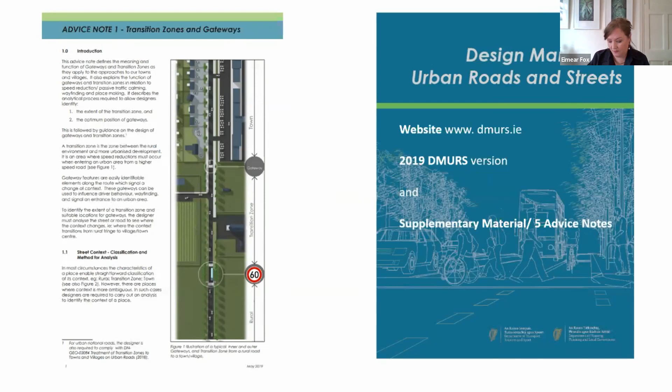So why do we have a DMURS and a TII document? Just to clarify the role of both: DMURS is mandatory for all urban roads and streets within the 60 kph zone, including gateways - both inner and outer - town core, transition zone, and residential zones.

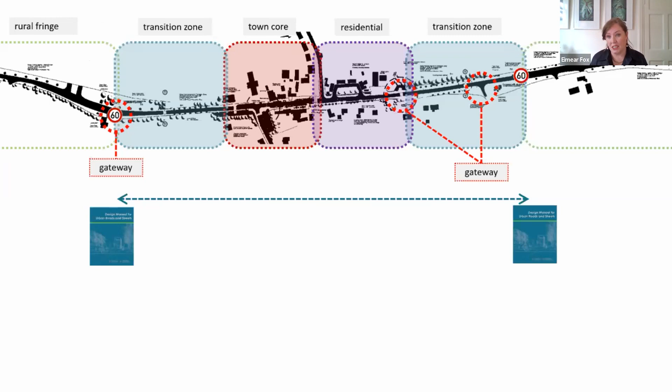It sets out practical design measures for placemaking and to encourage more sustainable travel. The TII standard complements it, describing the requirements in particular for national roads, covering traffic calming within the 60 kph zone, but also the rural fringe, which is the section of road on the approach to the 60 kph.

The rural fringe is the area between the high speed road and the lower speed sections of road, generally about 500 metre sections on the approach to the speed limit. One of the key design challenges is that the rural fringe looks very similar to the rural sections.

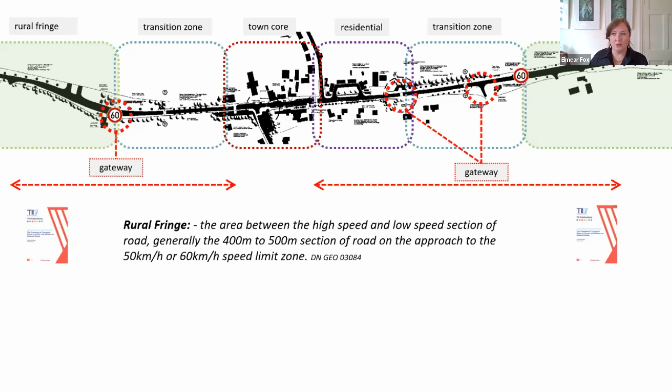So there can be a very abrupt change in terms of the streetscape of towns and villages, especially with hard shoulders. There are a lot of safety considerations in the rural fringe which don't apply in the 60 kph zone, which again limits the design tools. It's an area we're working on in TII, and though it's outside of DMURS, it's important to see it in the context of the journey through the town.

Transition zones typically contain several community facilities - schools, sports clubs, churches, health facilities, open spaces, larger retail developments and light industry. The streets in transition zones can create important safe and green connections between these different land uses and densities of development.

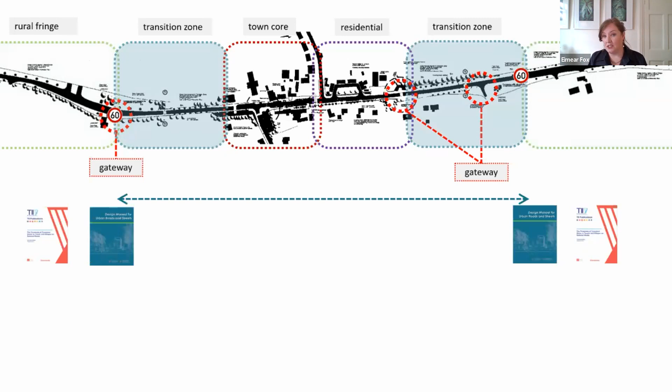The transition zone document also deals with gateways - both documents do, actually, and you can see the different focus in a sense. The DMURS advice note looks at gateways as points that signal a change of context or a point of arrival. The TII definition really focuses on indicating where there's a change in speed limit.

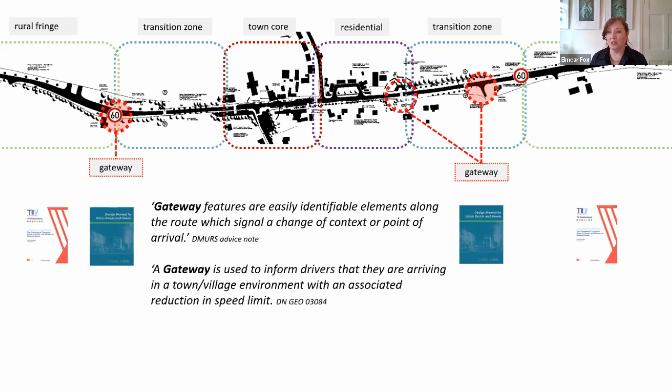But they're both incredibly complementary. It's about having as many functions out of the gateways, and they're also an important identity to the town, indicating your entry into a community.

So just briefly on gateways - the scale of them really depends on their location, the scale of the space they're in, and also the speed and pace of the viewer.

I added a slide here about the rural fringe, because talking with Leonora Neyman earlier in the week about Ennis, we were discussing how a lot of towns and villages have gateways that are part of the motorway network, which is again in TII's remit. So how do we look at that speed reduction from a motorway through to a gateway?

The second image there is Birr, which is a really lovely sculpture at the gateway to the town, combined with really strong avenue planting, and planting used to define active travel as well. So it sets up a very strong kind of procession through to the town.

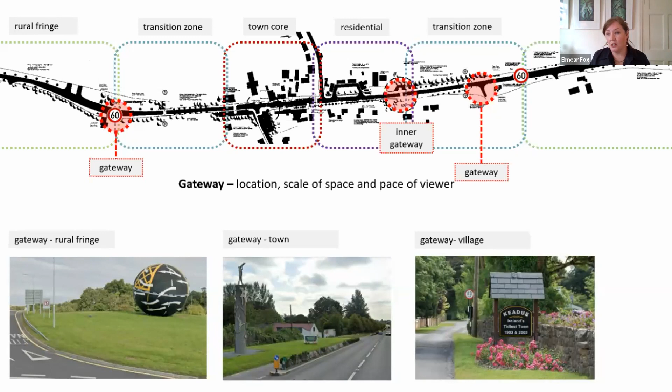And then you go right through to smaller villages where obviously the scale is much smaller, the roads are much smaller. This is Keadue in Roscommon, which again has a very strong planting palette at the start to really catch the eye as you're coming to the 60 kph zone.

The other thing we really want to look at is opportunities when developing the initial visions for schemes. Traditionally the focus tended to be on the transport function of road schemes, traffic numbers, transport and engineering requirements. But we really need to move this focus away from that and recognize that really successful streets have other key elements: water management, biodiversity, landscape, and opportunities for local communities.

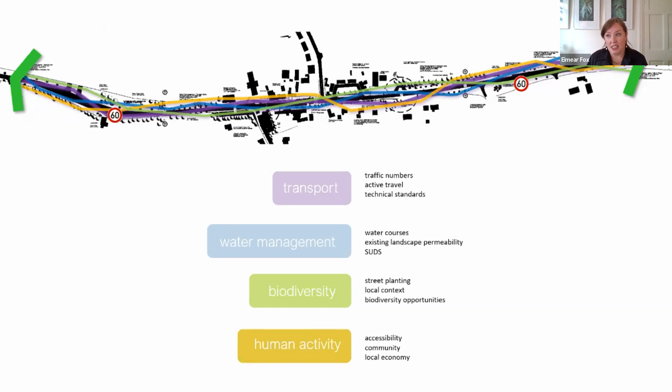Many times the street might be the only really public space in a village, so all of these threads need to weave together to make the most of the space. We need to really look at how transport investment results in advantages beyond just network efficiency, a systems approach, if you like.

This thinking very much aligns within ourselves and TII with their sustainability implementation plan, which really looks for all our projects to deliver benefits for all of society, and also then the UN Sustainable Development Goals.

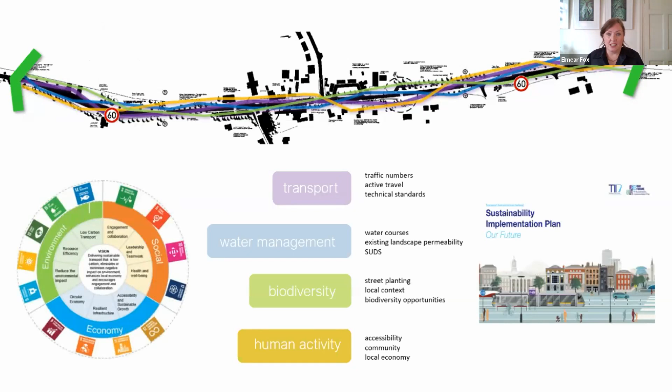In terms of reference and guidance for transport, obviously there's DMURS, there's also the new cycle manual that's due to be published. As Jason said in the intro, there's the pollinator friendly management of transport corridors, bringing biodiversity. We have the new interim guidance on SUDs, and actually DCC have a really good sustainable drainage design guide.

And then really following on from DMURS, we're looking at who is using the streets and looking at design tools to focus on particular street users, which I'll go into in a bit more detail.

This is a slide that I actually borrowed from Mick Bradley. Thank you, Mick, for letting me use it. He talked in one of the series earlier where it struck me - he was talking about how our town centres are the heart and that we're the blood cells.

Not being too cheesy, but in a way, transition zones are the arteries. Is it kind of counterproductive to spend money and time enhancing town centres if there are poor and clogged routes to hinder people from sustainably accessing them? Again, we need to look at the full system.

One of the key characteristics of many of our transition zones is that generally we have space, unlike in most town centres where space can be at a premium. So in transition zones, when applying both placemaking and traffic calming measures, we do have the opportunity to reallocate space in a more equitable way.

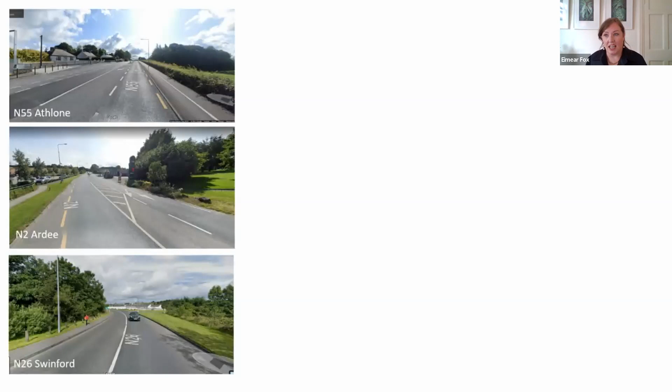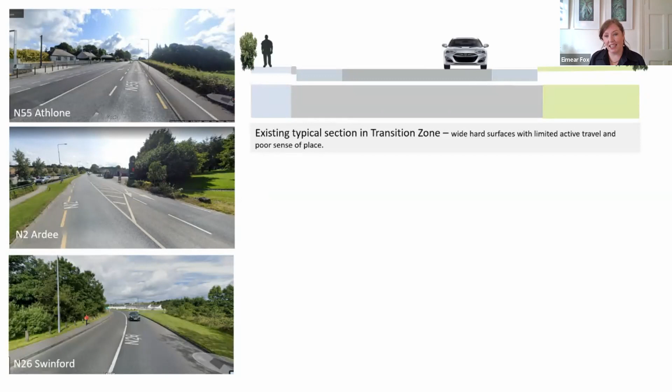And there's some examples of transition zones. All of the examples I'm going to be using are national roads because that's where we focus in TII. But you can see that applying standardized technical guidance really gives quite a standardized approach. Generally in these areas there's excessively wide carriageways, tends to be little active travel, and quite a poor sense of place, really.

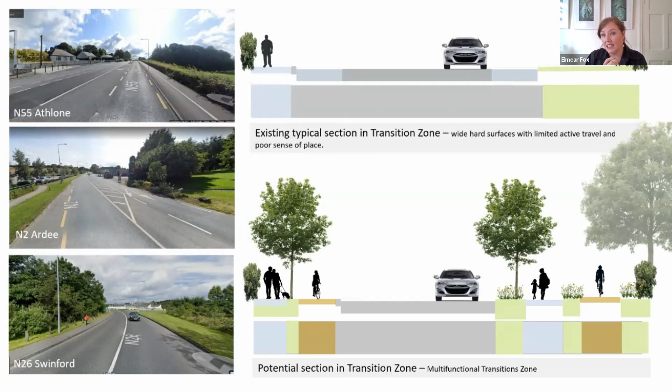So if we look at reallocating space, we can best see how our streets can achieve the sustainability vision - space made for walking, cycling, and landscape, which has multiple functions. By creating more pleasant streets with multiple functions, you encourage a wider range of users and get more ecosystem services in terms of carbon sequestration, pollution control, water management.

If we just focus on water management, for example, trees catch rain in their foliage and branches, and some of that evaporates while the remainder is slowly released back to the ground. The SUDs function, of course, increases as the tree matures, so we need to ensure that they're planted to ensure good future growth.

Tree root growth is also important because that decomposition of roots increases soil infiltration rates and overall soil infiltration capacity. And the very act of reducing the carriageway width reduces the load on the existing drainage system, which are most often combined drains.

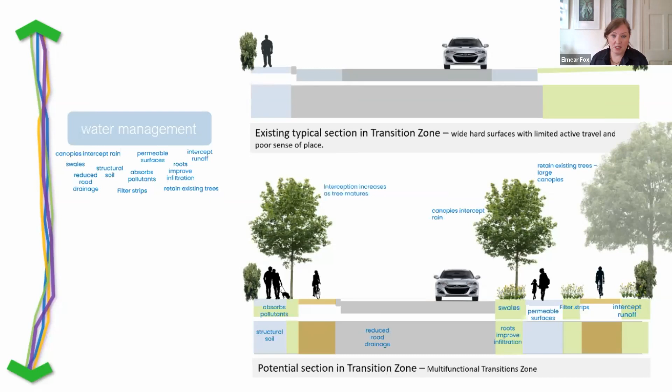Buffers between paths and cycleways create filters, which also absorb pollutants.

And if we look at community, people movement, because there's a lot of schools in transition zones, providing safe routes to schools can establish walking and cycling patterns at an early age. The more people who are out and about, the less social isolation, which results in impacts on mental health. The more eyes on the street, the less crime. So again, these functions need to be considered.

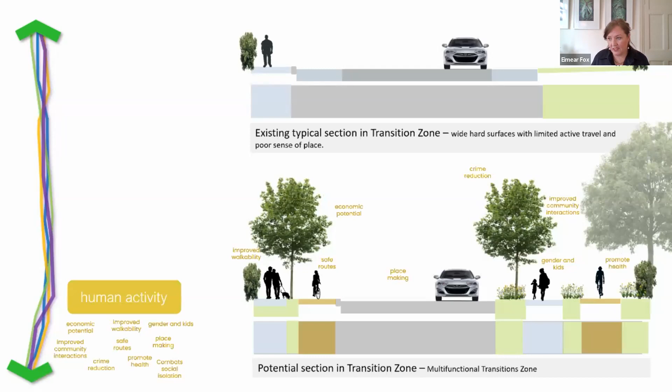Biodiversity: street trees can contribute, for example, to an increase in the number of bird species, especially when they're connected to blocks of green along the transition road zones, such as sports areas or hedgerows. It's actually really important that we retain existing trees and hedgerows because they're established natural communities with their own interactions.

Trees sequester and store carbon. They've got a cooling effect. So they're one of the few climate positive design elements of road schemes.

We also need, when we talk about trees, to address roots. I know it's unfortunate for road engineers, but all trees have them. We're always getting the argument against trees because of tree roots. But if they're designed and managed from the initial stage, they don't necessarily have to be an issue. The key is that you have sufficient room for the root volume to grow.

Trees also have the bonus that they actually appreciate in value and productivity as they mature. So they really are a great return on investment, but they need to be planned for right at the design process. There needs to be a root management strategy using root directors, linear joined-up tree pits, for example, and protection of roots of existing trees as well.

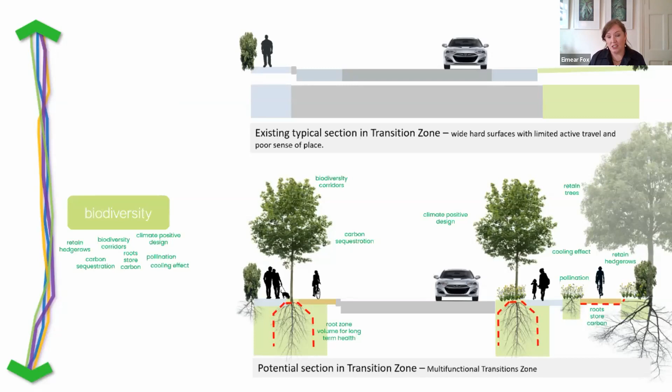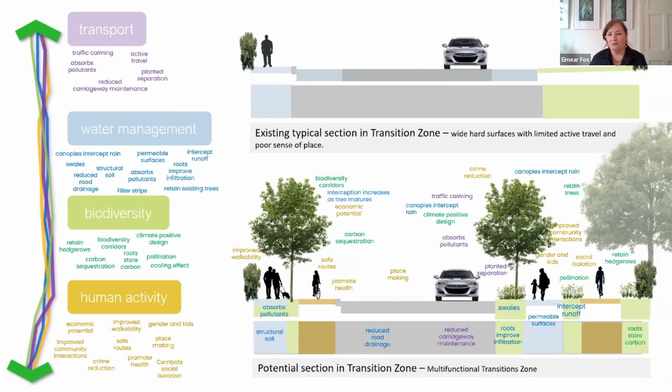You can see that high levels of movement and use by different groups at different times will promote urban integration and result in safer spaces. So we really need to recognize all these interrelationships to gain the most from our streets and make the most of all these synergies.

And we can really only do this if we recognize their value at the start of the design process. Given that there is space in transition zones, it's great to have a more flexible approach to design. Things don't necessarily always have to be in a straight line - we can make it about the journey rather than getting from A to B.

Another really critical issue that we found in transition zones is topography, because for a lot of people, changes in level can significantly affect their mobility. A lot of our transition zones, especially in towns on river banks, come down the side of a river valley, so there tends to be slopes involved.

So having, for example, mid-slope breakout areas for opportunities to rest, to regroup with groups of kids, spots to pause and play, in very simple ways - areas to enjoy the view, connect with the landscape, or just to step out of the flow of pedestrians. If kids are learning to cycle, it's all a sequence of spaces.

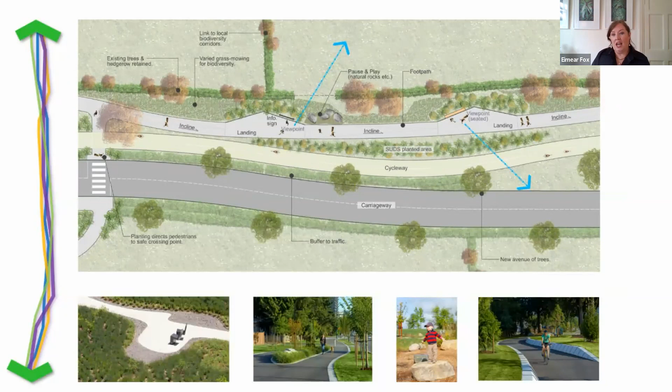Going back to the people who use the space, the community - DMURS advocates the pedestrian-first hierarchy of road users to encourage more sustainable travel, which is really brilliant. But when we talk about people-focused mobility, which is actually the core of Ireland's new sustainable mobility policy, we need to really think about who these people are.

I hate the term vulnerable road users because it kind of implies a level of strength and adversity nearly needed to get out on the streets - a battle of the fittest. But we do need to consider who these pedestrians that we're putting first are: their gender, their age, their travel patterns - it's not always about getting from A to B. Other aspects like viewing height, walking speed, all influence how a street is used or not by different people.

And this is just an example - there's a friend of mine whose dad lives in Wicklow Town, and I was asking her how he was getting on. She said that he doesn't get out an awful lot now because he feels he's in the way. He's getting old, he feels like he's too slow. When he's out on the footpath, he's worried that if people pass him he might fall over. And she lives in Abbeyleix, and her exact words were: he loves our wide, flat paths.

So when he goes to visit, he goes for a walk down to the coffee shop, has his coffee and cake. She knows there are benches along the way that he can stop and have a break. The footpaths are wide so he can be as slow as he wants. He meets and chats to people. So this is the reality of how road engineering can affect social isolation and mental health.

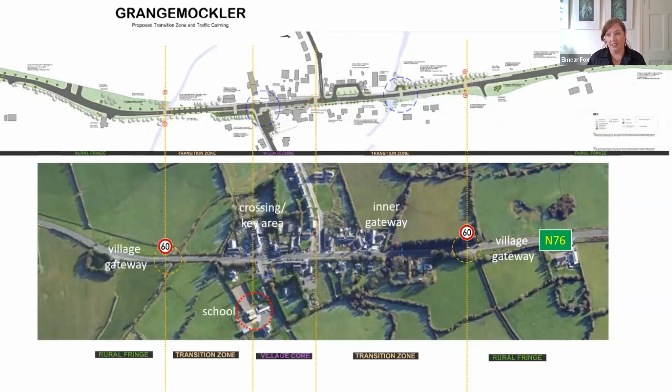Following the process of analysis and road zones, opportunities for gateways and key areas were identified, and a sketch scheme was developed, which we brought to Part 8 with Oliver Tierney and the road engineers in Tipperary.

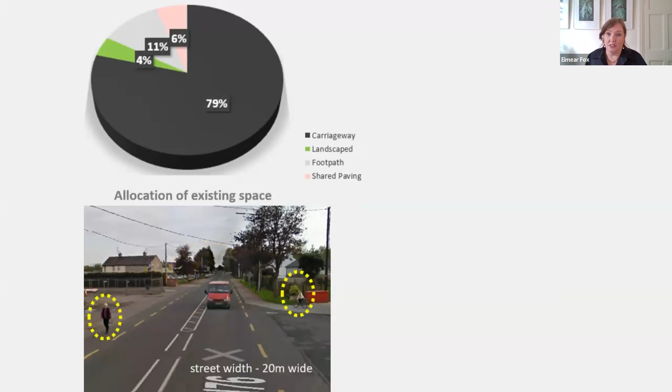The really interesting thing about Grangemockler is to see how space is currently allocated. This is the transition zone link between the residential area, and you can see that currently the space is really dominated by vehicular traffic - 79% of the space. This is at the expense of other road users. There's a poor lady there walking to the shops and there isn't even a footpath.

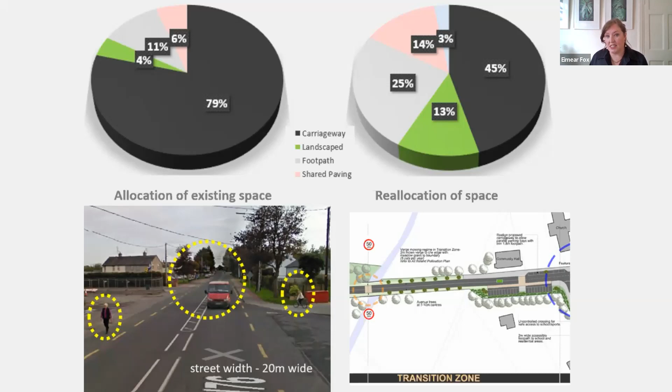By the primary design tool of reducing the carriageway width, there's such a significant reallocation of space, with pedestrians gaining so much space, from 11 to 25%, to move through the village. So it does create a more equitable street and allows people of all ages and mobility to travel. Just bear in mind that these graphs don't show the quality, it's purely the quantity.

You can see in the plan below that actually there were no footpaths at the shop and the pub and the town core beforehand.

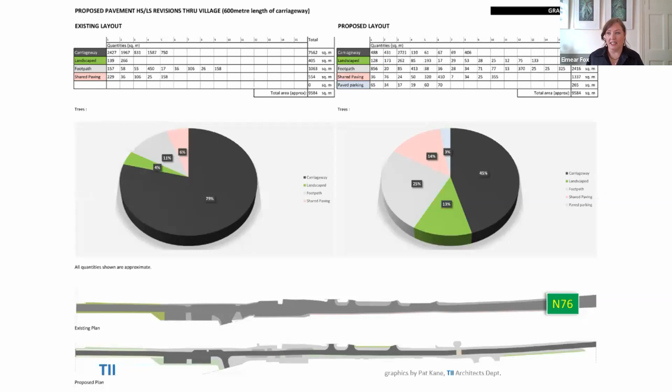But one of the things we found is that all proposals can be hard to get through the process. At Part 8 stage, there was a complaint from one person who said that putting the footpaths in meant that they're not going to be able to drive right up to the door of the shop. So traffic is such a big issue when it comes to Part 8.

We found it was important to have visualizations - we did these sketches for Oliver before he was going to meet one of the councillors, nearly the night before, just to get it over the line.

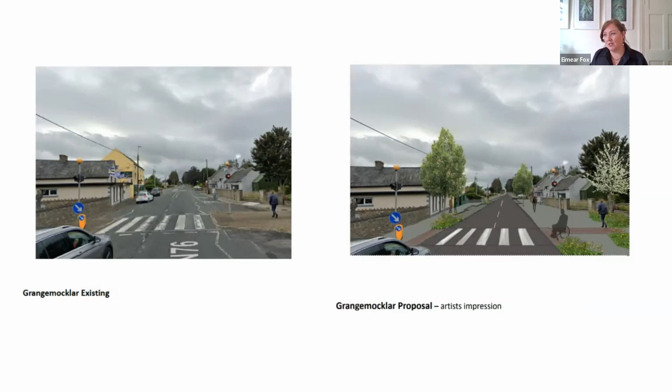It reminds me of something John McCarthy said in one of the first talks of this series, about the need to educate councillors, because these schemes can fall or rise on a couple of car parking spaces. It can be a huge barrier to approval. So it's a lesson learned for us.

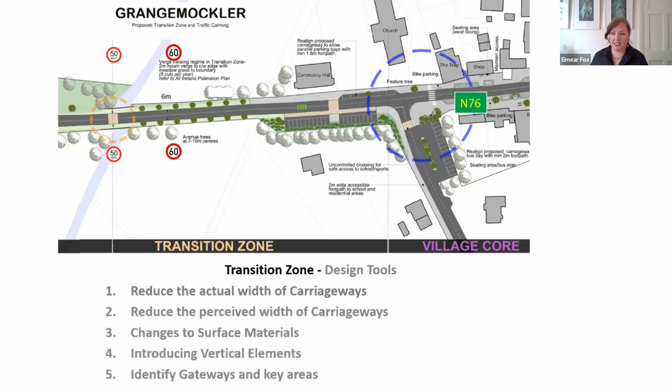So again, in the transition zones, key design tools were reducing carriageway width, reducing the perceived width with parking, changing surface materials, introducing tree planting as vertical elements, and identifying gateways and key areas.

Following on from Part 8, we got Cathal O'Mara, landscape architects, and his team came on board to advance the project to tender and detailed design stage. Cathal worked up a brilliant set of drawings, following the concepts and strategies outlined at the Part 8 stage.

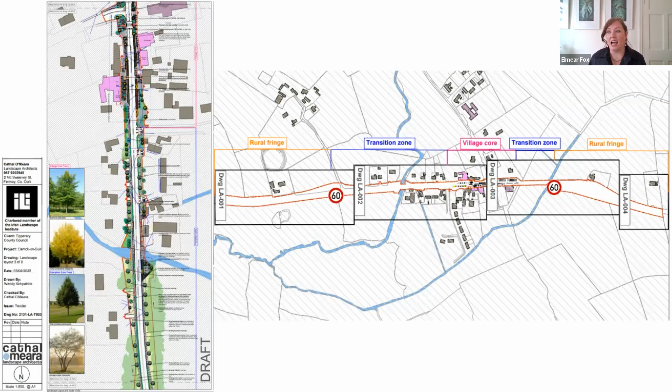In terms of gateways in this scheme, after analysis, the gateways don't necessarily always align with the 60 kph point. It was felt that the location of the gateway would be more appropriate at the junction, where there was more space for it to be maintained. So here they don't necessarily always align.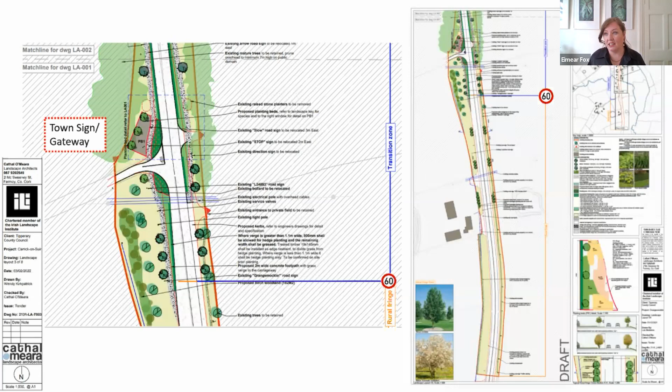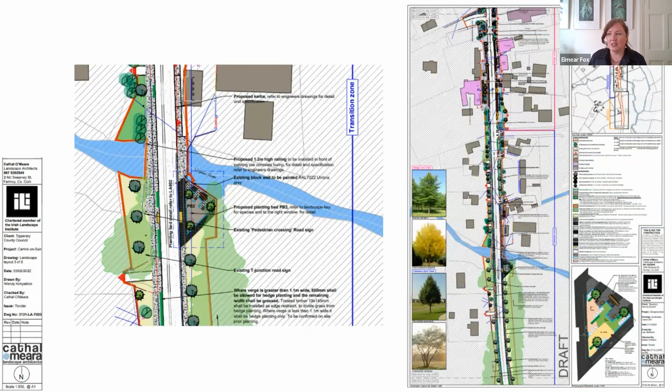A key part of the analysis was figuring out where people moved, how to use hard and soft landscape to make the street safer, and where interaction with the local context helped make a better journey. For example, creating a resting spot halfway through the transition zone by the waterway, where there was future planning for a riverside park. So it's about getting as much value as we can and thinking ahead in the scheme.

It was interesting last week, one of the speakers talked about how when you tighten up radiuses as part of speed reduction measures, you get the space back. This is what's happened here in Grangemockler, but we thought carefully - all of that space didn't need to be paved. So we used landscape to get as many functions out of it.

It's got directional functions, directing people to safe crossings. It's got traffic management to prevent curb mounted parking. It intercepts footpath runoff, so it has a SUDS function, and it's part of the placemaking. It's multifunctioning, and there's a really good example from London.

I think it's Hackney on the right, where this was actually a large roundabout that was traffic calmed, and the space was all paved over that was reallocated. But they actually went back in a couple of years ago and planted up the corners. You can see the SUDS function, it's got a cooling effect, and it directs people to crossings.

There's a guy there happy to let his child out of the pram because there's a bit of a buffer. So again, when we get space back from the carriageway, we just need to think about how we can get as much value out of it as we can.

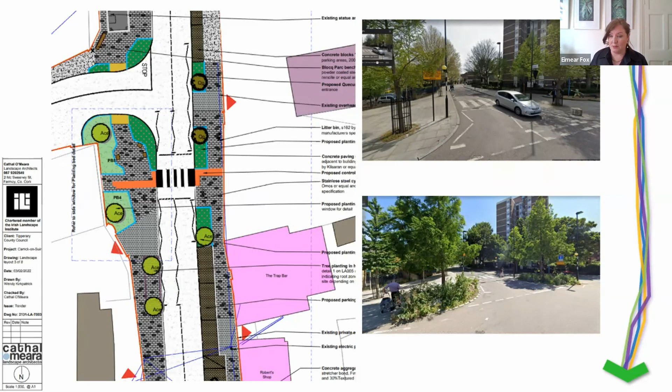So in Grangemockler, the multidisciplinary approach really carried all the way through from Part 8 to tender. We all worked as a team - Fiona Bahan was a key part of it as well, TII, road safety.

For example, when we were looking at street trees, we all worked together to make sure that the issues the road engineers had, in terms of concerns about loadings on the curb, could be worked with to ensure we got maximum capacity for tree planting. So there was back and forward between all of us.

The other issue is that we are using a tree pit detail that is flexible in space, so if we come across utilities, it's got leeway to either incorporate the utilities or change in shape. But that does need a certain amount of multidisciplinary approach nearly to the site stage, construction stage, because we'll need to be on site and Cathal will need to be on site when the ground is opened up. So there's a bit of, I suppose,

uncertainty. We're also hoping to reuse materials in line with the circular economy. I know project managers hate uncertainty, but there is a certain amount of cooperation that's going to be needed right through to the construction stage.

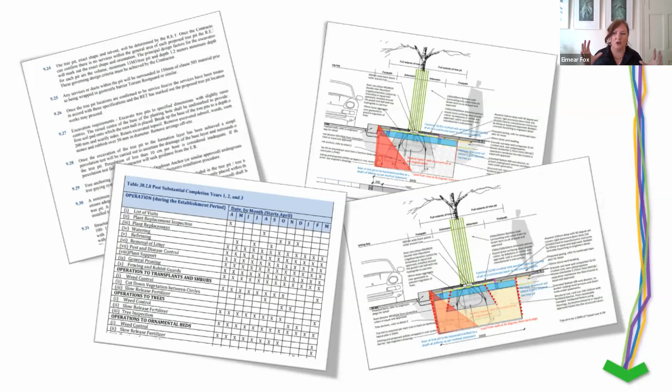We also have a 3-year maintenance contract, the idea being that we will have the planting all well established at the end of 3 years at handover.

Another quick example is Carrick-on-Suir in Tipperary. Again, we went through the same process of analysis, and I just wanted to talk about schools, which are particularly key in transition zones.

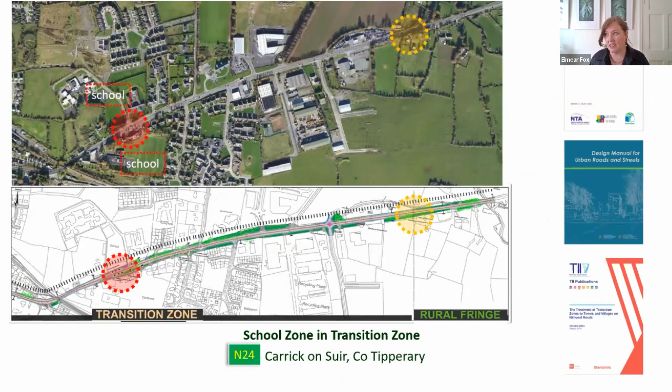The NTA recently produced the Safe Routes to School guidance, which has some great design guidance in it. Our own document also has a focus on these particular zones as well. And when we talk about making transition zones safe for sustainable transport...

In Carrick, the school was actually within a 10-minute cycle of virtually the whole town. Talking about the 15-minute city concept from Paris, the ideal is that most daily necessities can be accomplished by either walking or cycling. So applying it in a crude catchment way to Carrick-on-Suir, it was really interesting to see again the importance of transition zones for movement.

The Southern Regional Assembly is advancing the 10-minute towns concept in this region. Carrick-on-Suir wasn't one of the project areas—ARUP are doing that work—but it was interesting to apply that concept.

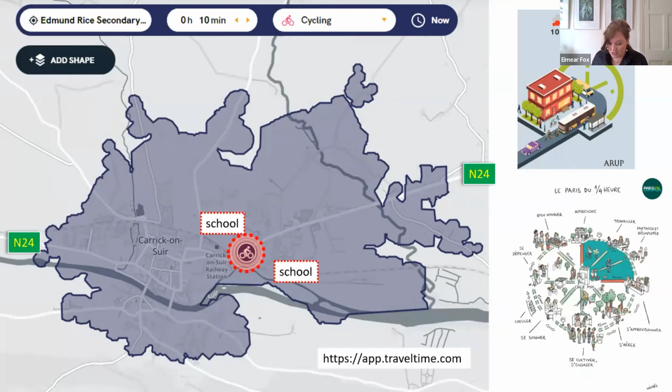So again, we used all the design tools and wanted to create a place so that outside of school hours, in this long drag of the transition zone, sloping downwards, you would have a space halfway through that would also be a resting spot.

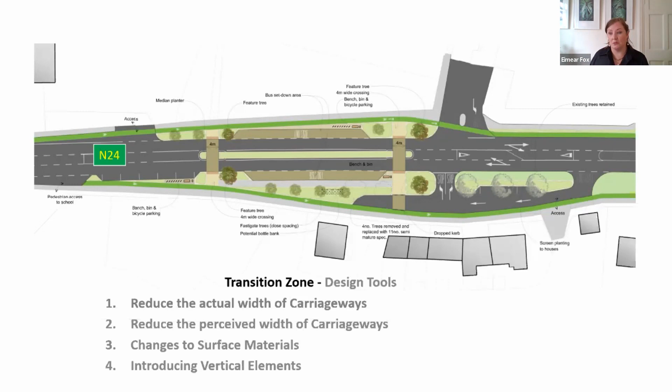Cathal came on board and produced a great set of drawings. We used planting to create spaces. When we look at the space reallocation, we focused the hard surface, the pavement areas, on areas where the school kids will congregate, getting them safely to crossings where the bus stop is, promoting the use of cycling and public transport to get to schools. And we've more soft landscaping as a result of this reallocation of space.

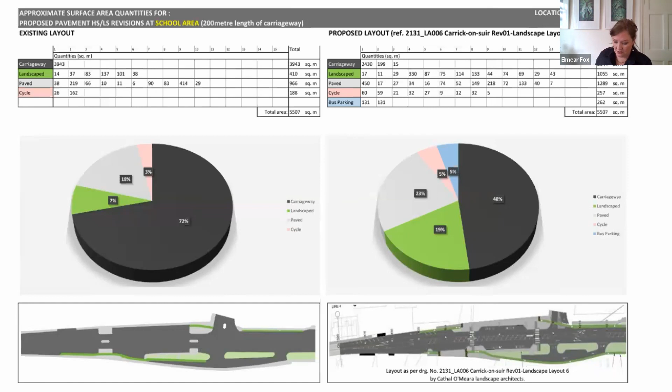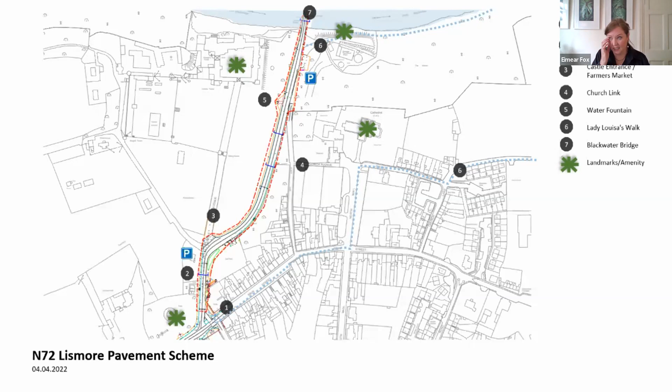Quickly, this is another scheme we did in Lismore—this is just a couple of weeks old. This is a transition zone where we had a quick design session with the area engineers, just to look at opportunities at a very early stage of the project. Lismore, again a really beautiful historic settlement, is on a national road and again has the topography issue—it goes from the riverbank up to the castle.

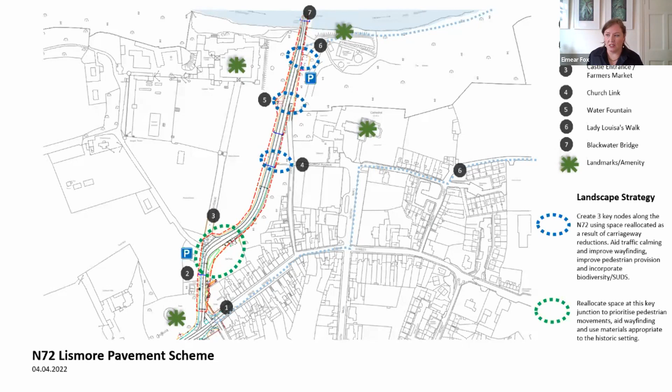So we had an hour or two of discussion with all of us to see where the opportunities would be. We looked at places where we could break up the extent of the transition zone, create places, create linkages to other pedestrian routes, and looked at the issue of reallocation of space.

And this is the road at present. There's a really lovely historic feature there, but it's kind of lost in the hard surfacing. There's very poor pedestrian connectivity.

So again, taking the four threads, we just looked at ideas now—this is a really early stage of the scheme. It's just sharing ideas, part of the multidisciplinary approach. Some of them may be developed, some not, but it was great to get that chance to see what was possible.

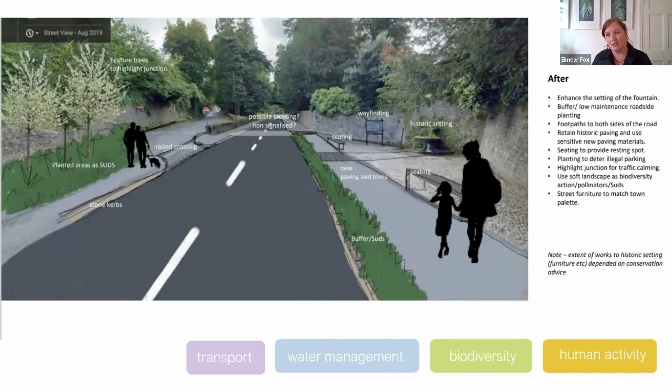This is Luas Finglas then, for another scale of project. I consider this a transition zone too, because it's going through from light industrial down to residential areas, down to the city core.

Our objectives are to increase sustainable travel and create places. We met a woman, Yvonne, who does Adopt a Patch and a huge amount of Tidy Towns work. She told us that a lot of people don't let their kids cross the road because you have about 5 or 6 traffic lanes to cross to get to the cinema and the ice cream shop. When we told her what we're doing, she said it'd be great if kids could cross the road, which isn't too much to ask really.

Going back to the issue of who is using the space, TII did a really good study called Travelling in Women's Shoes, looking at how gender influences traffic decisions and sustainable transport. Barry Transportation are the consultants taking this to railway order, and they carried out a gender survey for us—the first time this had ever been done on a transportation project in TII. This was critical because we really wanted to understand who is using the street. Who is not using the street is actually more important.

We're getting initial feedback from them, and it's amazing the information we're getting—there's a huge disparity between men and women cycling, and between older women and younger teenagers out on the space.

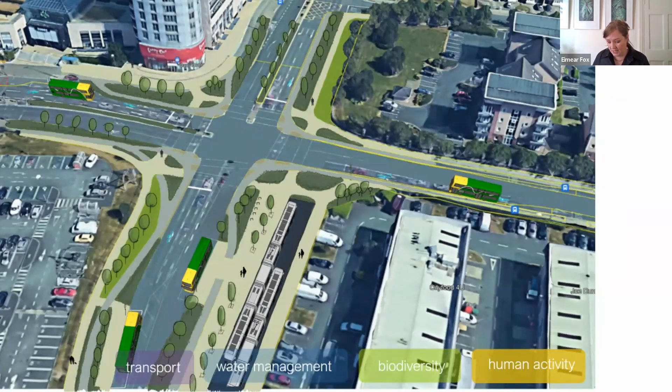Going back to the concept of reallocation, what really surprised me - we just did this literally yesterday, I saw this for the first time - I had felt we were adding more landscape, but actually what we were doing was using all of the landscape areas so they have a function: directing people to crossings, creating a place, separating the modes of transport. So we haven't actually increased the landscaped area, we've just used it much more intelligently to get as much use out of it.

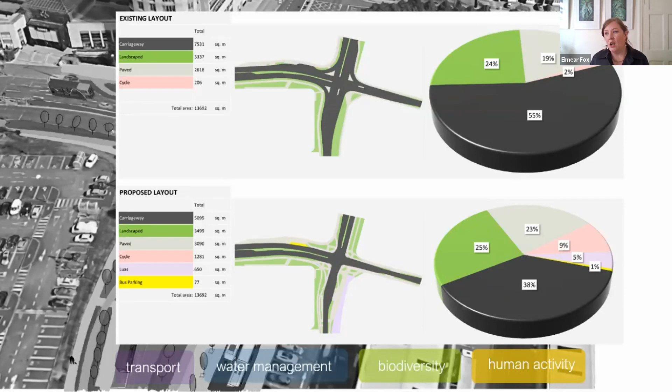The biggest issue is that we've taken space from the carriageway and given most of that back to public transport, bus and cycling, which is the key project objective. So that's the end of my talk.

I hope you can all see that there at the moment. So myself and Eamon are going to talk you through the Ennis Public Realm Regeneration projects.

As was outlined, we were very fortunate to successfully get funding for 2 such projects covering the majority of the town centre area. A lot of today's presentation will focus on the first project, the Parnell Street Laneways and Bowways project, which completed construction in December of last year. Our next project, which is very long - O'Connell Street, O'Connell Square, High Street, Barrack Square, Barrack Street - is due to commence construction this summer.

So the learnings from one project continued to evolve the design of the next project, and that's the focus of where we're going to be today.

A little bit about Ennis itself: we're the largest town in Munster, population of 25,000, anticipated to grow to over 40,000 by 2040. What is important in terms of town centre design, slightly different from Eimear, is we have significant issues with space in the town centre - a medieval town centre streetscape, very narrow laneways, traditional buildings.

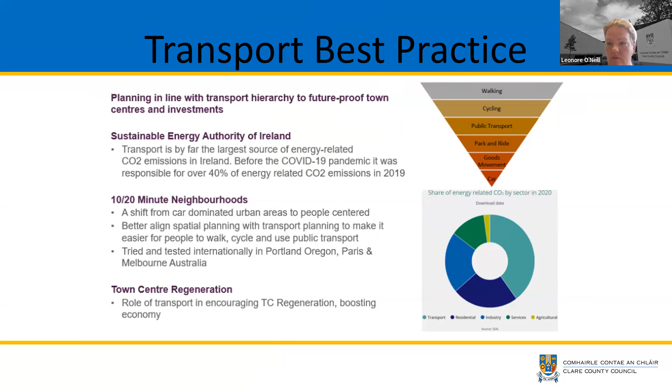So where did we get to with our public realm design? In the original drafting of the previous county, or the current county development plan 2017 to 2023, there were some health checks done on our town centre, and it was found that a number of our streets were significantly underperforming, with low levels of footfall, high levels of vacancy particularly of ground floor units, and that a number of our laneways were in poor condition, weren't very inviting, and didn't serve the function of enhancing permeability in the town centre area.

So our councillors requested that we do a feasibility study, and we were very fortunate to get funding under the Commission for Economic Development of Rural Areas, or CEDRA, who gave us funding to develop a number of feasibility studies of different areas of the town.

In that, we were trying to examine how we can maximise the potential of the public spaces in the town centre to boost economic activity and to create placemaking.

At that time everything was looked at, and one of the things that was requested but couldn't be delivered was the concept of coverings in the town centre. That was down to access for emergency vehicles, varying building heights, and the fact that we're an architectural conservation area. But the development of our overall project would have come from that original feasibility study.

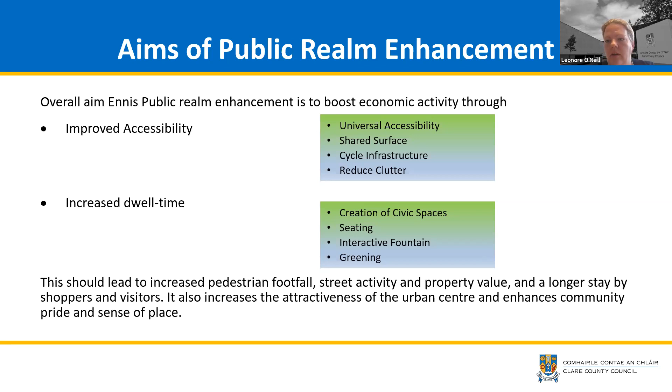And obviously through increasing dwell time, you're looking at creation of civic spaces, seating, fountains, greening. The intent is to make the town centre a more pleasant experience so that people want to visit and spend time there. That's particularly important given the growth of online shopping and how easy it is for people. Town centres have to transition to become more experience-led, and a big part of that is having a high quality, inviting public realm.

So in terms of the challenges, of which there are many, in our own case in Ennis, obviously the historic town centre was significant. We have extremely narrow streets, and making those streets universally accessible was challenging in itself. We have extremely congested underground services, different levels and falls within the streetscape, and the need for traffic management and to facilitate deliveries. Under both URDF funded public realm projects, both have resulted in loss of car parking spaces, which have been reallocated. That is the constant challenge: where do you provide alternate parking, or how do you manage your parking regime with a reduced number of spaces?

So from there, we're going to go into some of the more detailed and technical aspects, and I'll leave Eamon to talk to that.

Thank you very much. County Council and the Ennis Municipal District were looking for a method to evaluate the town centre area from an accessibility point of view. We approached the Clare Older People's Council and conducted walkability studies in early 2019.

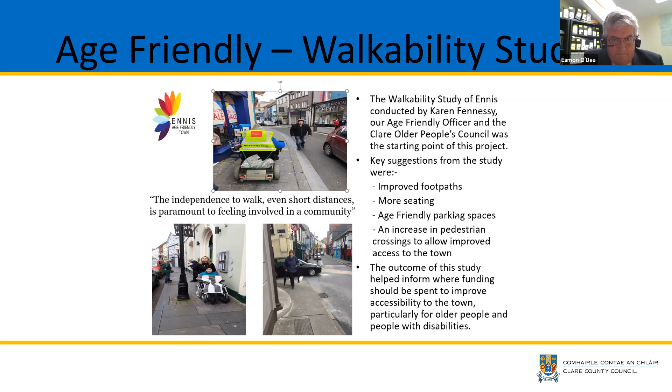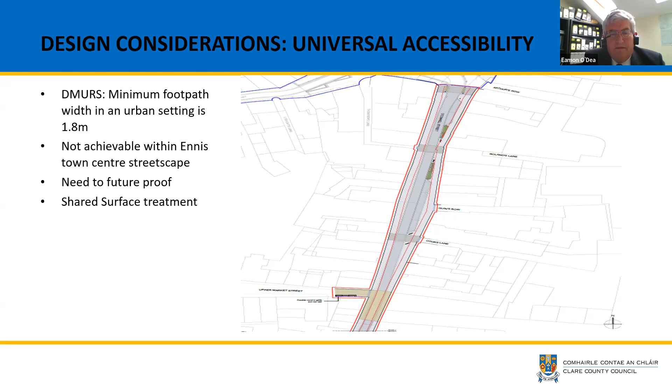So in regard to future-proofing the town, it defined that a shared surface format had to be considered. If you can go on to the next thing. Okay, so I suppose you return to DMURS and we can all identify what's stated there about pedestrians and shared surfaces: an integrated space where pedestrians, cyclists, and vehicles share the main carriageway.

This may include streets where the entire street reserve is shared, or where designated sections may provide for pedestrians or for cyclists use in a shared surface carriageway along part of the street.

We initially had a traffic street with footpaths with normal curbs on the side. But after our conversation and outputs from the walkability study, we changed design, went back and did a further Part 8 on a section of the Parnell Street project, and went to a shared surface format.

As you go forward into the streetscape where the street is quite narrow, it wasn't possible to continue the corduroy form, because in doing so we would have reduced the available footpath outside the corduroy to a very small area. So what we did was put the corduroy transverse across the footpath to identify to the person approaching that they were now going into a shared area.

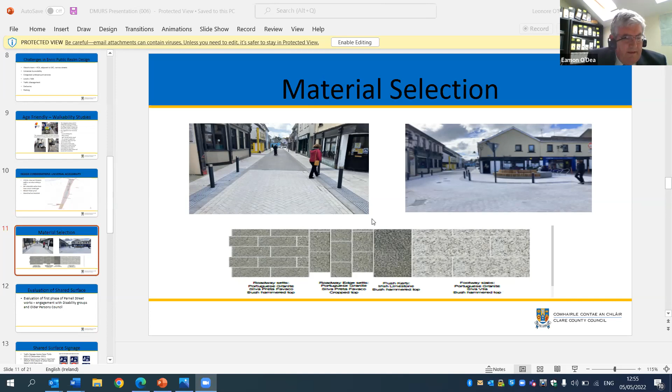There was an important facet when we had the first section of the road completed in Lower Parnell Street. We brought back those who had been consulted with at the commencement of the works and showed them the finished product. There were rather interesting interactions with different groups.

For wheelchair users, corduroy paving can be difficult to cross with crutches or other walking aids, and also with limited leg movement or painful feet. They were very happy with the format where we didn't have the corduroy on the side of the road, and instead had the brush hammered curbs and the darker coloured paving outside it.

Wide footpaths and doorways with crossfalls and steep ramps, doorways with uneven entrances on one side and threshold lower than the other, are the worst.

There's a particular circumstance where there's a number of places on the street with a variance in the threshold level of the premises, and we had to vary the footpath levels on one side. Seat level a bit high in some areas for some users, but very much appreciated. The handrail to help maneuver or transfer from wheelchair or scooter to bench and vice versa - very happy with that.

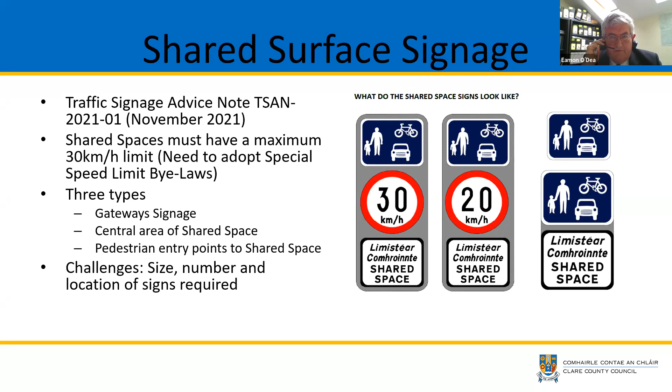So I suppose I'm going to take over the rest of the presentation. I hope you don't mind the swapping and changing.

The hope is that we are ultimately going to have a transformative project that is far more pedestrian friendly, far more attractive, and will instill more of a sense of pride, which would hopefully boost tourism and economic measures in the town centre. So a lot of the focus was on Parnell Street, which was the first project.

The combination of both projects together will be almost entirely shared surface treatment, so the majority of the town centre is now going to be shared surface. Elements had to be considered around provision of defined loading bays, where disabled parking is going to be, the need for widened footpaths on entrances into the area to connect the shared surface back out further to the town periphery, and the need for high quality surface materials, street furniture, lighting and signage.

Public art is really important. What you want to do is try to engage people back in with your town centres. So in the next project, one of the features we're putting in is an interactive pavement fountain. The intent is to try to reconnect families and children with the town centre, which was considered very inhospitable to persons with buggies - based on the actual footpath widths, they found it quite difficult to navigate the town with buggies. So we want to bring a bit of joy back into the town centre.

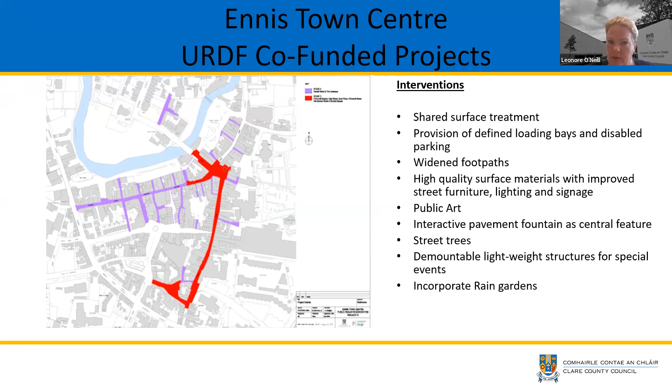I suppose moving on from there, where do you go next? And what's important? Following on from the Parnell Street project, one of the big things we're focused on is continuing to get feedback on measures that we introduce.

So as part of our age-friendly town initiative, we've undertaken more recent town surveys. That involves surveying older people, both residents and visitors to the town centre, and asking them around various elements of what works and doesn't work for them. The intent is that you can repeat this survey over a number of years to see, are you meeting the needs of an older population? Because if you can meet the needs of an older population, you should be meeting the needs of all the population.

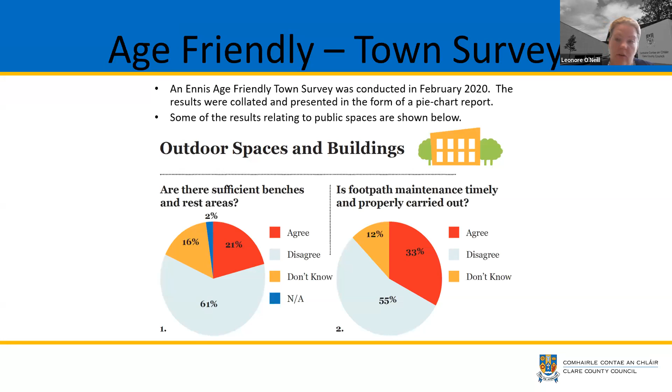One thing mentioned by Jason - we have extensively used whatever funding we could get, for the advantages of trialing out measures. We were very fortunate that we got significant funding from the National Transport Authority under their COVID-19 interim mobility measures.

Given our significant issues with footpath widths in the town centre, we trialled temporary pedestrianisation. We also reallocated road space, removed car parking in certain areas, installed parklets, and put in brand new directional signage on the periphery, directing people into where parking was available.

So there were a huge number of interventions that we trialled. As part of trialing all this out, we formed a town centre stakeholder group, which comprised a number of the statutory authorities, the Gardaí, the HSE, all the MD councillors. We brought the Chamber on board, the Older Persons Council, and we brought anti-pedestrianisation groups into the conversation, and environmental groups.

During the trial, we amended hours of pedestrianisation. We added elements, we removed elements, and it actually brought a real understanding as to how the town might function into the future. Because part of the rationale for shared surface in the town centre is it future-proofs it if there was ever a desire to pedestrianise it without any additional costs.

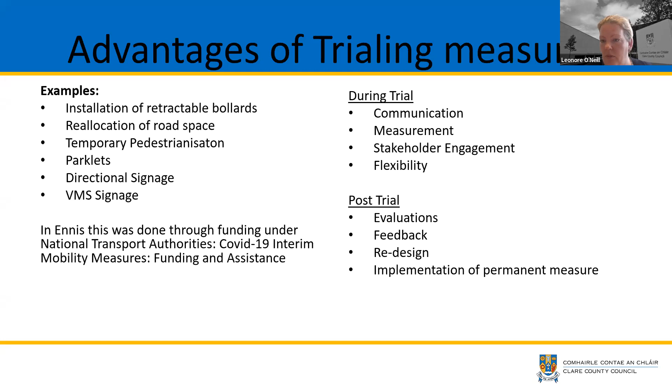So following the lifting of all COVID-19 related transportation measures in the town centre, we immediately went out and did a pedestrianisation survey. We asked people, would they like to see it? What hours, what streets, what do they feel needs to be done to facilitate it? The pedestrianisation issue has been a long-standing debate in Ennis, as I'm sure it is in other areas, and it's always been very negatively perceived. It's been trialled on a number of occasions, but on this occasion, it actually came out overwhelmingly in favour of it.

So we had 92% of the respondents indicated that they would like to see pedestrianisation either now or in the medium term. Only 8% said they were against it, full stop.

And actually what was very surprising is that almost 37% favoured full-time pedestrianisation, with a further 44% favouring 1 to 7 days a week, which was far more extensive than we would have been led to believe, or the fact that our councillors would have initially been favourable to looking at.

As a result of this survey, we've introduced a second trial, pedestrianisation outside of COVID, where we have introduced pedestrian measures from 11:30 to 5pm, 7 days a week in the main town centre. It may eventually evolve into a permanent pedestrianisation. So I think trialing stuff, using whatever funding is available to see what works, and communicating, measuring and evaluating can really start to bring about changes that you wouldn't think may be possible.

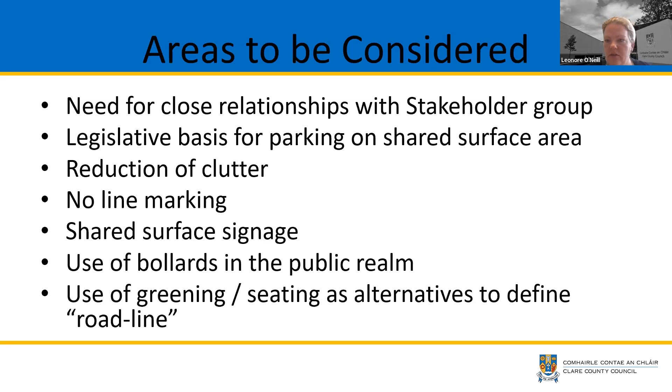What we've done in this instance is, again, we didn't want to put bollards into a shared surface. So we have increased the amount of seating and greening to define the road line per se, to stop illegal parking into the area.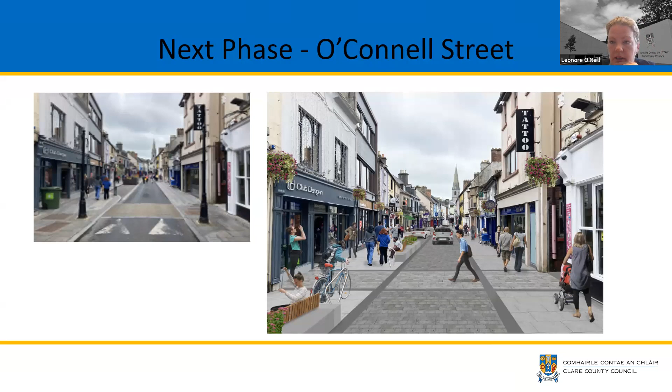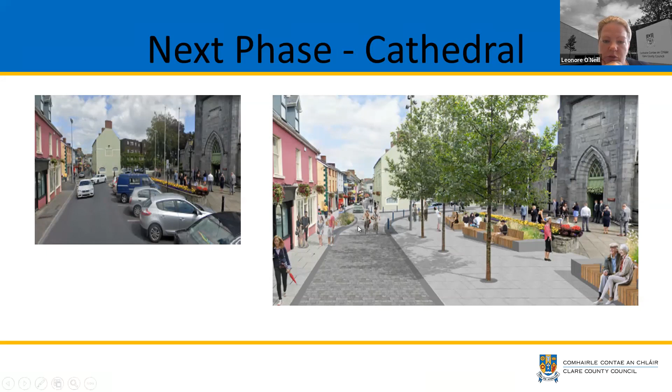Another consideration, this is a separate part of the same scheme, where we have removed all the car parking in the area. What's interesting here is that we used a rain garden to kink out the junction as a traffic reduction measure. So we have realigned the junction arrangement to actually force cars to drive slower in the area, while also incorporating greening and a nature-based solution, the rain garden itself.

So I hope you've enjoyed our presentation and our learnings as we've evolved through two public realm projects.

Be very remiss of us not to thank those that were involved in the scheme with us. Our project managers and cost consultants were Tom McNamara and Partners. Our architect was Nicholas de Jong Associates Urban Design, and the environmental, civil, drainage, structural, mechanical, electrical and PSDP was Malachy Walsh and Partners Engineering and Environmental Consultants. The contractor was Sheridge, and we also wish to thank the public and the people of Ennis who put up with us through all the stop-go of COVID, particularly the business community in the area. Thank you.